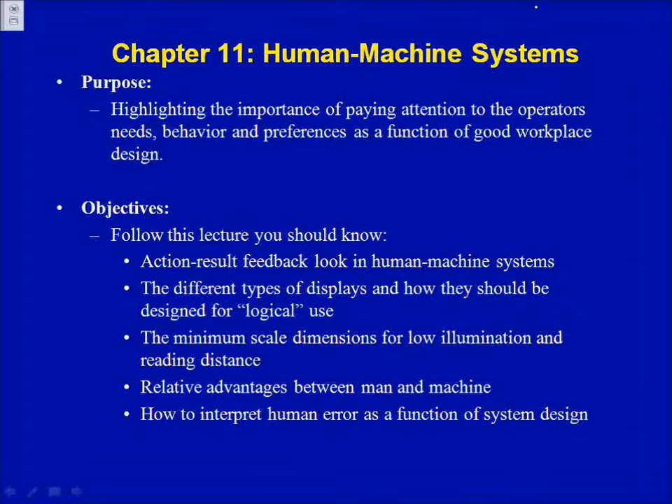But where this also migrates to a little bit is Dr. Proctor's class when he talked a little bit about how we respond to stimuli. And then the idea is how its form and function. And there's some fun things that I want to share with you in this lecture about that. One is that everything that we do is a measurement of risk, right? And there's no risk-free day on anything that we do. It's just the wrong place at the wrong time.

It's just crazy stuff. And I just saw some disturbing stuff on the news this morning about a new thing called One Punch or something like that, where basically you got these little gangs running around sucker punching innocent people, men and women, not suspecting it, and the idea is to knock them out with the first punch and get some thrill from that whole thing.

And so you could be walking along doing everything right, and then someone comes out of nowhere or sneaks up behind you and gives you a sucker punch, tries to knock you out. And it's very disturbing, this new thing going on. Apparently it's happening all over the country, including Chicago. But the idea is that we know what are your risks and always being aware, right? Being in the moment and knowing what's going on.

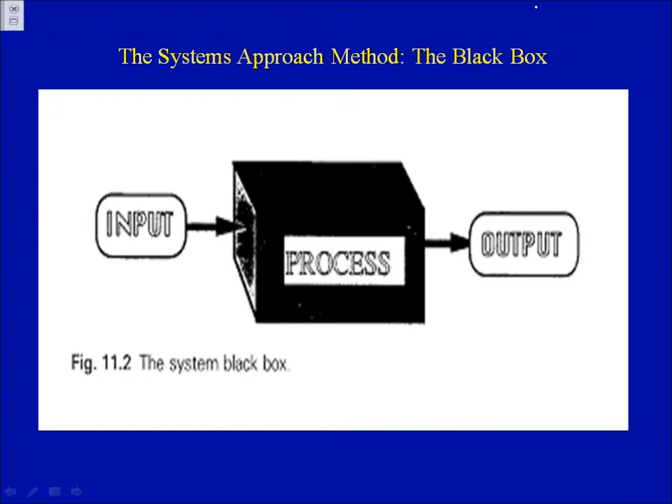Anything under the hood is like a black box. They said, who knew the thing needed oil? Like who knew it needed water? My God, I don't know. I've never looked under here, right? Because cars have gotten so reliable. So to many people, systems work in a black box kind of process, but there's a lot more going on inside that black box. And that's the whole idea of what we do. We have to figure out what's involved. We want to keep it as simple as possible, but we have to fully understand that process.

So in doing that, we have an action result feedback system where the worker or the person inputs information, you have an action, and the machine reacts to that action. You get a result, and then that gives you feedback again, and that completes the loop, right? So there's any number of processes that we're looking at. My lecture alone is basically, here I am, I'm your worker, right up here. My action is to give you a presentation. The machine is the projector, giving you this display. The result is, hopefully you're learning from this, and it feeds back to me, and then I continue the process to the next slide.

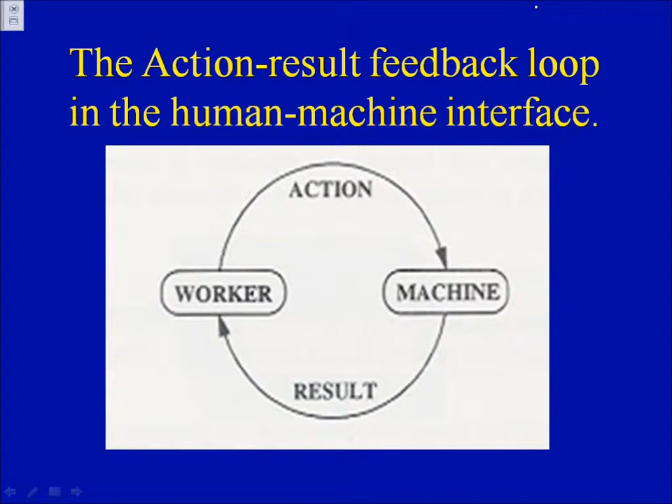So when we get into more complex systems, what we see is that we're looking at environment and materials. We have something very simple right here where we have the machine, we have the effectors, the changes, we have our controls.

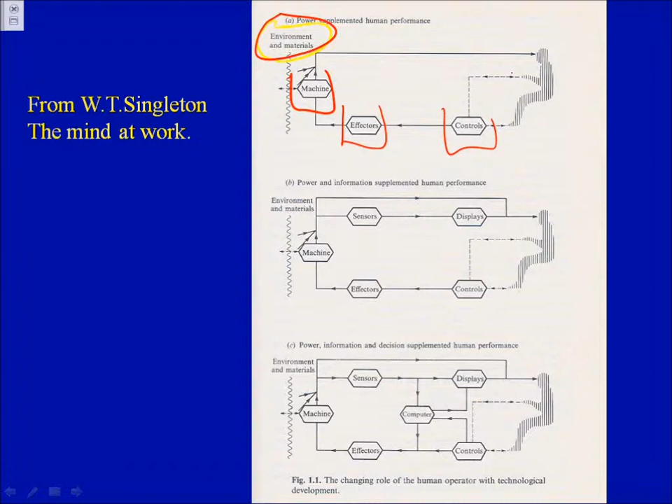This could be like a gas pedal or a brake that's giving us feedback. We're sensing the environment, we're putting that information that goes into that change. The machine could be the engine, for example, and as we're going down the road, it's giving us sensory feedback so we stay on the road.

Very simple system. Now we're going to add to that information where maybe we don't see the road, and now we're looking at not only a visual aspect, but actually we're flying what's called fly-by-wire, right? So one of the things that's been in the news lately is that many of the pilots that we trust our lives to have become so dependent upon the computers flying the airplanes, including takeoff and landing and so on, they are not sensing where they are or that they're in trouble. And so we're starting to see more crashes at airports and so on.

One of those occurred out in San Francisco, right, where the plane came in from Asia, and they're pretty much flying by wire, and they came in too low and too slow, and they basically hit the edge of the tarmac and busted off the rear of the plane. I think 2 people died in that, and one of the people that died was basically alive, but because of all the debris and everything, some rescue truck ran over her and killed her in the process.

But the idea here is that we're going by displays and sensors now rather than visually seeing things. So it gets a little more complex in that regard, and then we add to that the idea of displays and sensors, and then we bring in a computer to modulate everything. And all that information now gives us a process and a feedback where bringing in the computer gives us the quantitative information that we need in order to make decisions about go, no-go.

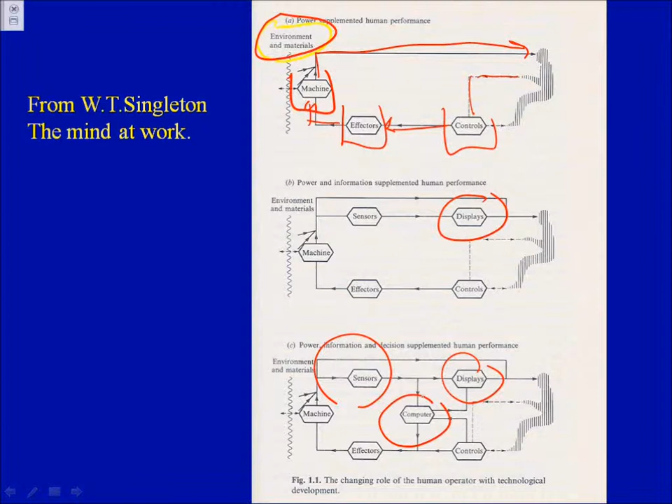And I talked a little bit about this, and in fact, manuals have gotten so much better over time, but we still get these manuals that are written where English is not the first language, and you're trying to figure out what in the heck are they saying, because by the time it's all said and done, it's like, I got 3 or 4 extra parts here. It's supposed to be assembled. Well, did they give me extra parts, or did I screw up? And you're looking at the instructions and the manual and the diagrams, and they just don't come together very well at all. So the idea is that from that producer, not only do we have a product, but we have a manual that shows us how to put together that product.

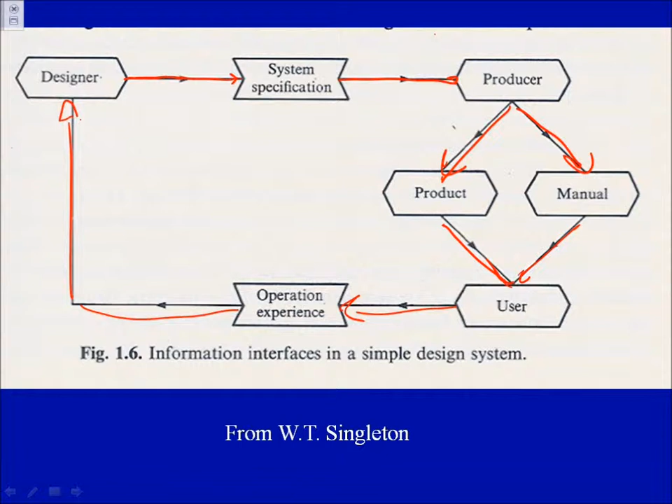That whole thing. So what I'm seeing more and more now, and it goes back to the designer, is that pushing it out too soon can result in some very negative consequences and outcomes. And, of course, we see that as it's being played out on the news daily with the Affordable Care Act website.

So system design process, notice that it gets a little more sophisticated. Our specs, our functions, allocation of those functions. And notice over here we have design of personnel and design of the hardware. And the idea here is on the software side, and this is on the hardware side.

Kind of interesting. Anyone who's interested in mechanical engineering, one of the first things they're going to tell you, if you want to get an advanced degree in mechanical engineering, is: are you interested in software or are you interested in hardware? And if you're not thinking about that actively, you say, well, it doesn't make sense. Mechanical engineering to me has always been about the hardware. And they said, no, there's a tremendous amount involved with software in terms of mechanical engineering and design. So keep that in mind.

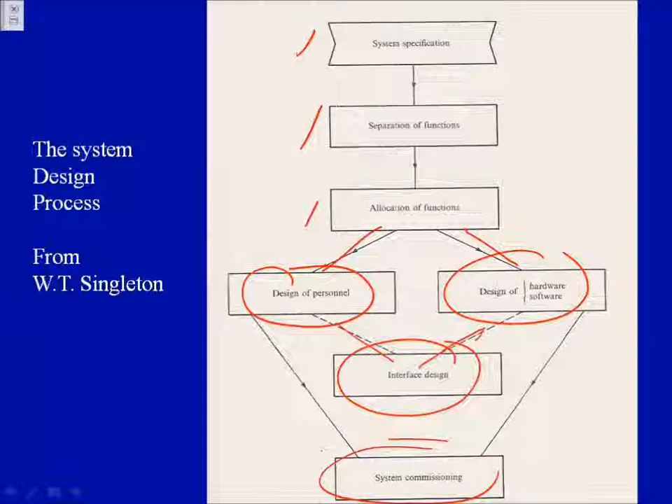And it all comes out here in terms of the interface, the user, and most of you know about that, right? The user interface system. And then you finally commission that system, basically roll it out when it's ready and people can use it. So it gets more complicated now in terms of the human factors side of the equation. Notice we have design and we have operations.

And notice as we go down on this side here, documentation and access, functional separation, internal communications and feedbacks, performance, critical incidents, and accidents, all part of the design process. Over here in operations, we have information presentation and training. Training is critical, right, and the idea is that the more training has gone on over here, it's going to give you some feedback about the design process.

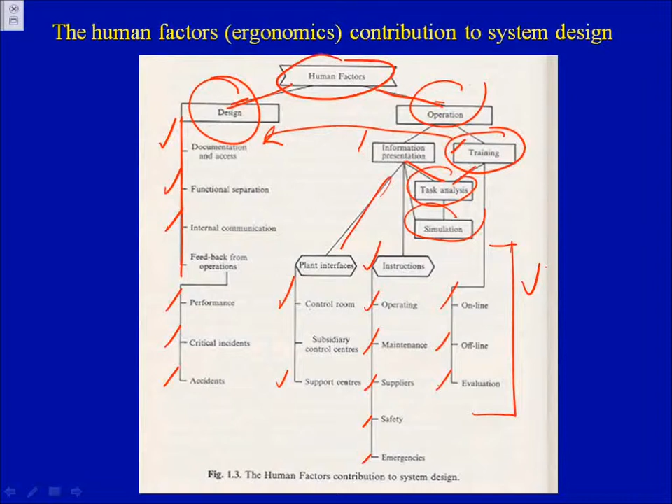But then as you go through this, you have task analysis in terms of how complicated it is. Then you have simulations. But down from this process here in the information presentation, you have the plant interfaces in terms of how it's going to come out for control rooms and so on, all the way down to support, to the instructions. And again, this is about the manual, operations, maintenance, suppliers, safety, emergencies, and over here, online, offline evaluation in terms of how this is going to work regarding the training aspects of it. Not only by the users, but those that do the maintenance and updates and functioning.

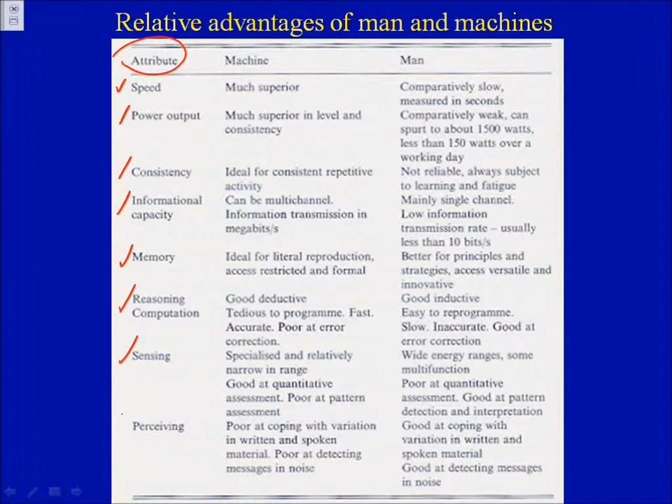So this is one of my favorite slides. I'll hold you responsible for this, so make a note there on a couple of things. And this is really the difference between machine and the person, right? So if we look at the attributes, speed, power, consistency, informational capacity, memory, reasoning, sensing, and perceiving, for the most part, we get trumped by machines.

But it's going to be a while yet. I think the magic number is something like 2050, where finally you reach that tipping point where the computer now has all the sensing capacity and capabilities and thought processes as we do. In fact, I think Time Magazine just came out with a front page article about where that tipping point is between computer and man.

But right now, the machine, in terms of speed, is superior. We're pretty slow. We go in seconds. They actually go in milliseconds and faster. In terms of power output, they're much superior in level and consistency. We're kind of weak. We have our spurts of energy at about 1,500 watts to less than 150 watts over a workday. And right now, in terms of energy output, you're pretty close to the other end of it. Your mind may be functioning, but in terms of energy output, it's lower. In terms of consistency, machines are ideal for consistent, repetitive activity.

No, I don't know what I'm doing here. I don't know why that's here.

We're not very reliable, always subject to learning and fatigue. Informational capacity can be multi-channel. I'm multi-channel, I can do more than one thing. Believe me, you cannot multi-channel. If you're looking at your computer right now, it's something else. What you're doing is you're sharing, you're flipping back and forth with me.

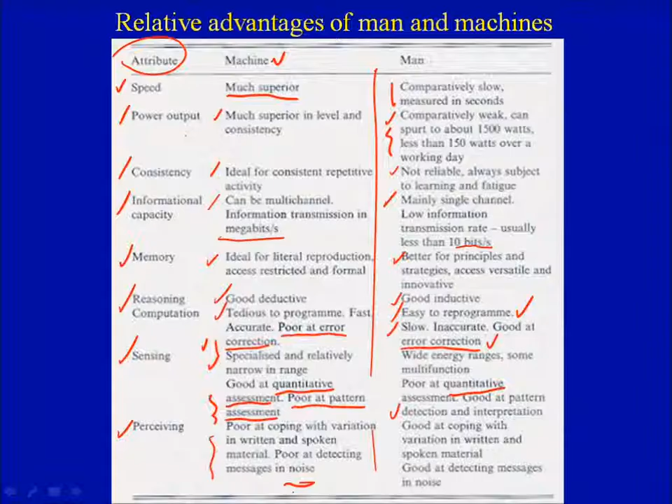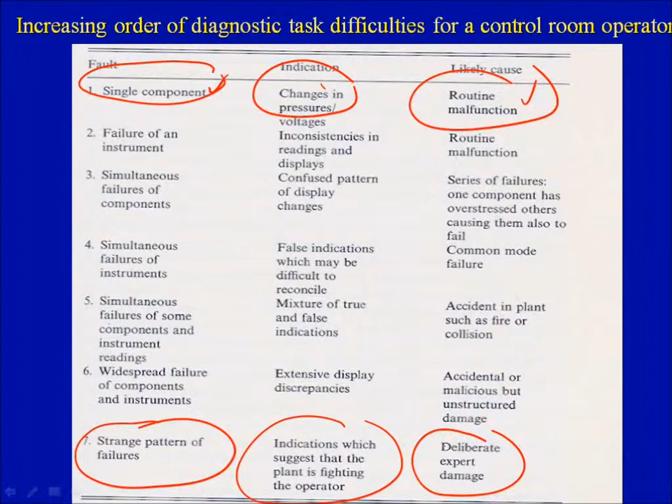And so what happened is, as in deliberate expert damage, they, unbeknownst at the time, were doing damage to a system that was trying to protect them. Very interesting. So it doesn't always have to be sabotage. It can just be they've never seen this before and reacted in such a way that the computers now were fighting them in terms of controlling the nuclear process.

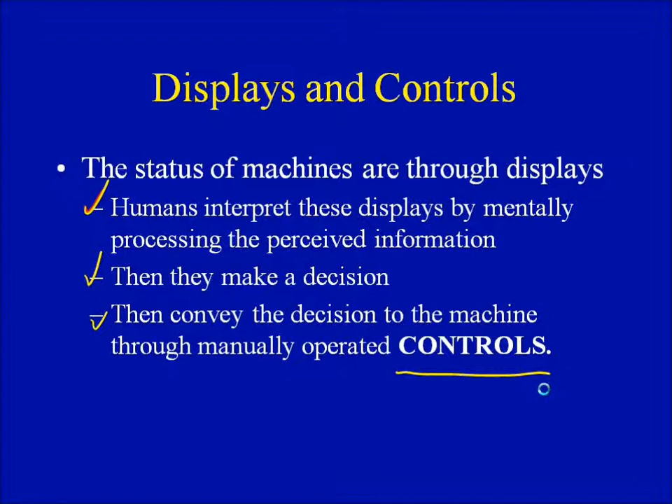Displays and controls. The statuses of machines are conveyed through displays. Obviously, humans interpret these displays by mentally processing and perceiving information. Then you make a decision, and you convey the decision through controls. We have direct and indirect. So direct sensing would be touching a hot stove, what you feel in terms of comfort level in this room. Is it too hot? Is it too cold? Is it just right? Indirect is a gauge.

So while I'm feeling and sensing the temperature in this room, I can go over here and look at this thermostat, and man, it is warm in here. The guys are saying, and the girls are saying, no, I don't think so. To me it's got a little bit warm up here. It's about 76, 77 degrees, according to that thermostat. But that's what the temperature is right there, not what it is back here. It's going to be different around the room. But there's your indirect, gauges and signals and so on. So I'm figuring it's somewhere between 75 and 80, depending upon where we are in the room.

And of course, we know why the ladies feel cooler than the men, or why the men are warmer than the ladies. You knew this from my first lectures, and why is that? Why are the men warmer than the ladies, or feel warmer in the same environment? You know this. It's an exam question. Yes? Well, the metabolism is going to be a little bit higher, but what drives metabolism? I'm going to give you a suggestion. Right, cross-sectional area of the muscles. Muscle mass is typically larger in males than females. Not always, but it's a larger cross-sectional area.

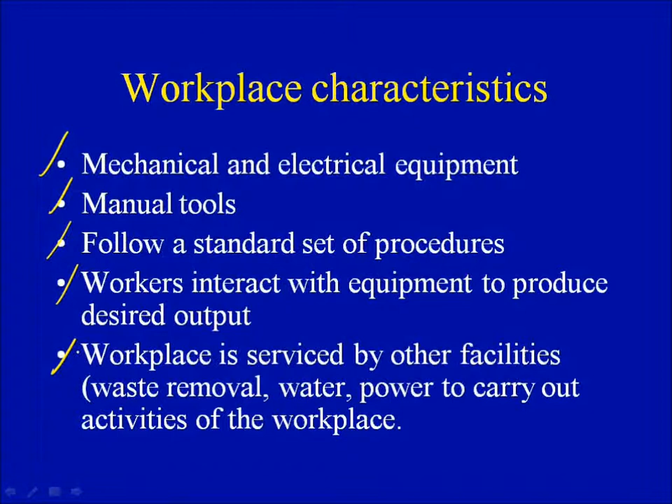We have tools to perform the work. There are standards and procedures that are in place to do the work. They interact with the equipment. There should be a layout or a protocol toward that end. And then there should be a maintenance process to that, because things do wear down. In terms of ergonomics and human-machine systems, design of tools to match the physical characteristics of the worker.

And again, what I've emphasized from the very beginning is that this is not about differences between males and females. This is about raising awareness in terms of those differences and leveling the playing field so that everyone has a shot at what they want to achieve in the workplace. And that's what this whole idea is about. It's not about let's grab Josh, for example, because he's a big guy and we're going to have him move these big bales of heavy things from point A to point B.

I said, well, why don't we get a vacuum unit and attach that up, and any one of you now here can just attach that to it and pick it up, bring it over here, and drop it down. Not only that, you can figure out what your return on investment is, and within 6 months, you're going to have that machine paid for. And not only that, you can hire anybody that you want because the machine's doing the work. So that's the concept behind this. A lot of companies don't get that yet.

Design of the workplace and workspace to meet physical characteristics. Design of controls and displays to allow the worker to operate and monitor the system processes. Development of job procedures that meet the worker's capabilities. And that's really the key right there, meeting their capabilities. Minimization of effects of external factors such as noise, temperature extremes, vibration, and so on.

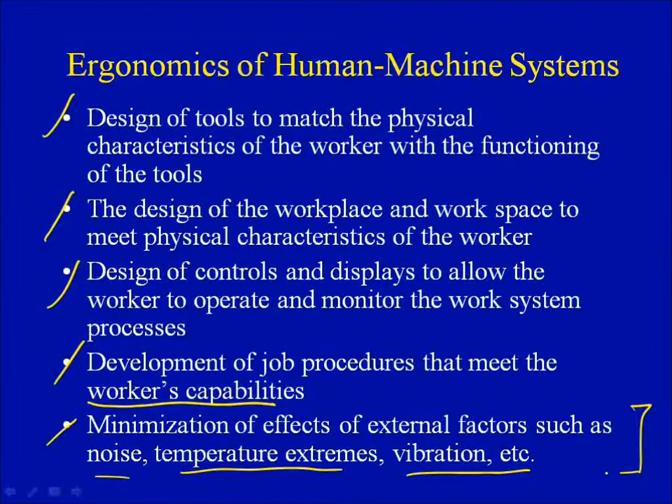Steps in design: objectives in terms of desired output, your input specifications, your materials, process description, functional allocations, interface design between the operator and the system components. This is form and function, just like you see right here. This is my interface in terms of basically what I'm looking at on the computer and what's being projected to you here. Facilitator design, mechanical assist, as I talked about earlier, and then testing and evaluation to make sure that the system works.

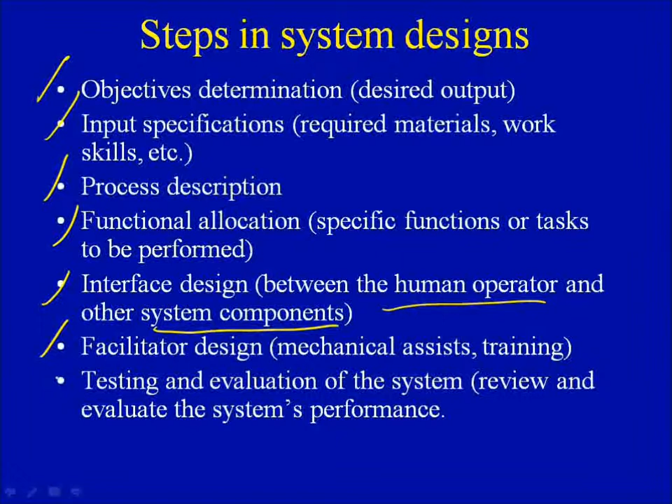Steps then are number one, prepare what needs to be done for the person to do their job. Observation, what information data does the worker have to do their job. Decisions and mental processes to do the job. So it's not just the physical aspects, it's also the mental aspects of it. Physical demands then, what are the physical tasks involved? And again, if they exceed most people, then the idea is mechanical assist, right, to level the playing field. And then termination, what steps do you need to complete the job? So in other words, what's called a work cycle.

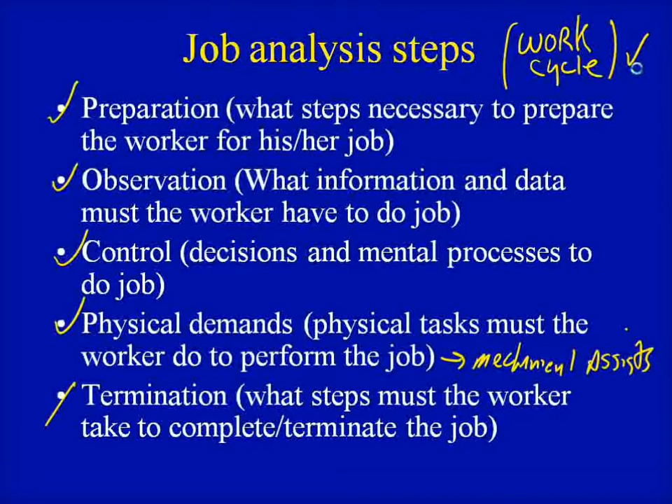Okay, so remember this, because we're going to get into that, and I'm going to test you on it. This is the work cycle. There's not a test that I have given where I've not asked this question in various ways. And so the idea is that we start out and we define a job, right? So as students, your job classification is student, right? We'll just start out there.

But then the next step down is what functions do you have throughout the day? Well, I get up and maybe your routine is to study a little bit in the morning, or maybe have breakfast and study a little bit in the morning. Maybe there's a workout involved, that kind of thing. You go to classes, then you have lunch, and so on. So maybe these functions that you have listed up here would be going to class, okay? And then the next step would be, what are the tasks with the function?

The tasks are coming in, actively listening, taking notes. Maybe before that, you're going to print off a copy of the presentation so you can annotate as I'm talking. And so that's the task. What are the elements? The elements would then be taking those notes to the specific slides that I'm showing in the slide deck. And then finally, the micro motions are putting little notes or asterisks there when Dr. McLaughlin stops and says, you really need to know this slide. So the micro motion is, I'm definitely going to put some little notes right there,

maybe some eyeballs. I love to put eyeballs in, because my colleagues at Yale who went to school with me at Michigan would kind of make fun of me, because whenever something was really important, where the professor would say, you really need to know this, I would always do one of these things right here. And if it was really important, I'd really start raising those eyebrows like, make sure you know that, and that, and that, and then that too. And then, oh man, make sure you know the whole thing from the top to the bottom. By the time I got done making all my notes, it would look like that. And they made copies of that and sent it to me later. And they'd ask for my notes. I was flattered, but they were actually having fun with me making all these notations.

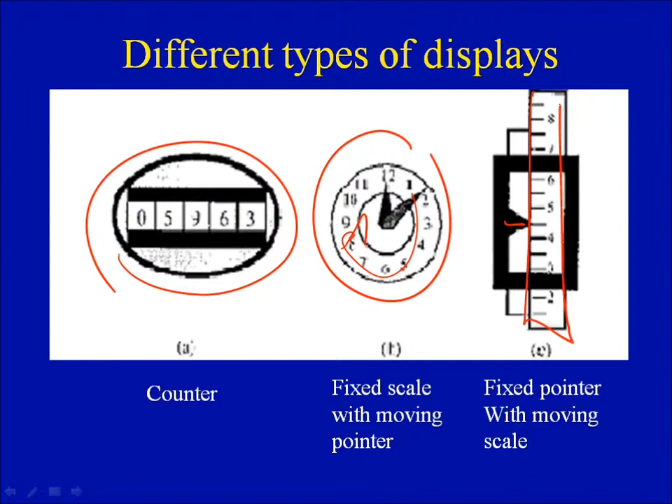Okay, so we get into controls and counters. These are good just at a glance. We can have a fixed scale with a moving pointer going around in a clockwise position. Or we can have a fixed pointer right here, and then this moves. This could be like weighing objects and so on. So guidelines for designing displays. Minimum amount of information needed to make a decision. You don't want too much coming in. Use digital readouts.

Use circular or semicircular scales instead of vertical or horizontal scales. Avoid moving scales. Use major markers in a natural order like 1, 2, 3, not 2, 8, 9. Avoid multi-scale or multi-pointers. Too many things going on to process. Display should be in a direct line of sight by the operator. In other words, you shouldn't have to look up or look down, but straight ahead or up at an angle. So where that exit sign is located, for most of you, it's within the angle of your line of sight.

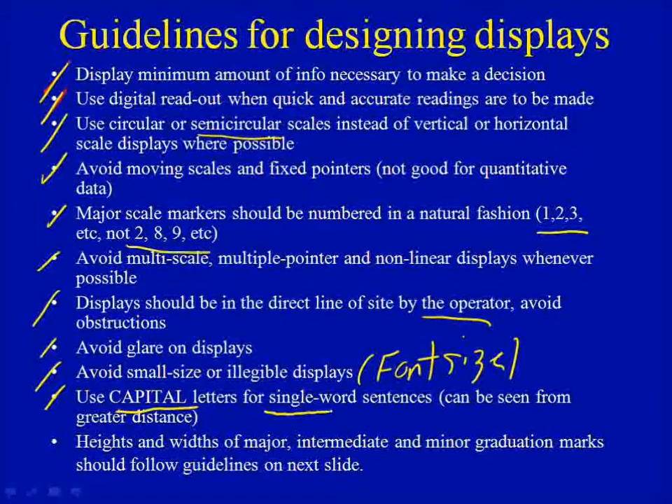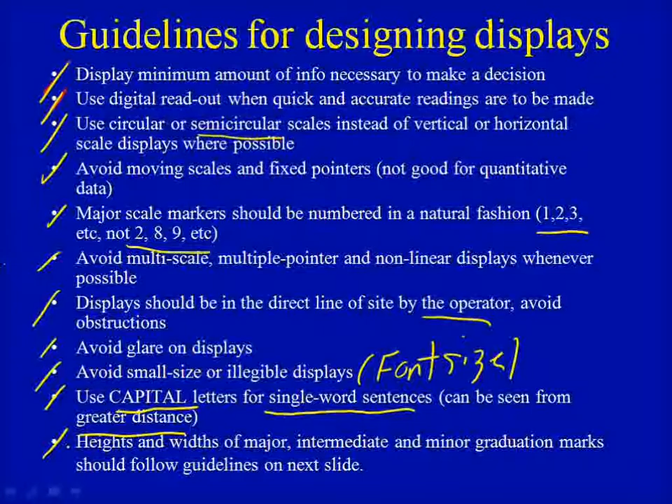Avoid glare, small size or illegible displays. And again, this is all about font, right? And I'm going to talk a little bit about that in a few minutes. Use capital letters for single word sentences. This can be seen from greater distances. Ta-da! Look at exit, right? You don't see a big E and a small X, I and T. They're all caps. Heights and widths of major, intermediate, and minor graduation marks should follow the guidelines that I'm going to show you now. And so this is where I'm going to ask you a couple of test questions that may become extra credit on the midterm.

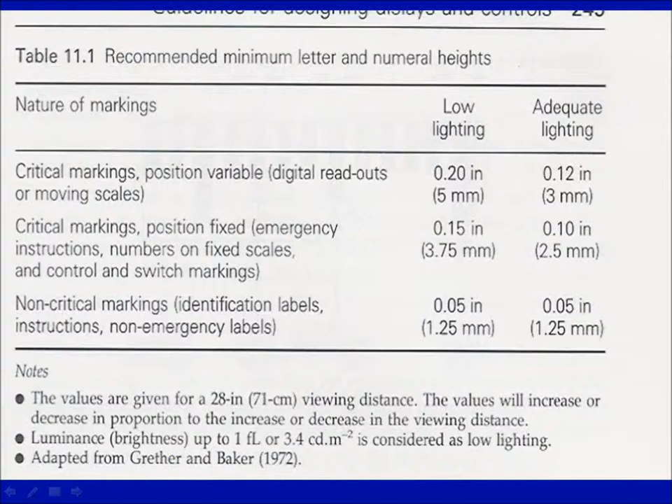And then in the next slide, right here, it also tells you about the width. The width in all cases will not be the same as the height. It's usually a fraction of that, 3/5, 4/5, something like that, and you can see those numbers. I will not hold you responsible for memorizing these differences, but notice the critical factor is the height.

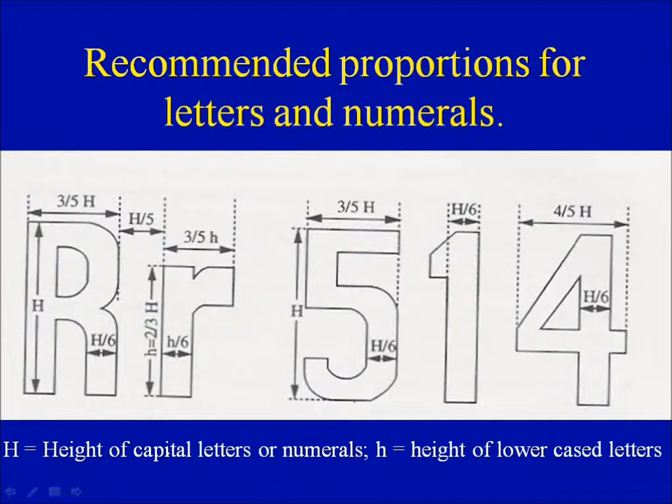And then the distance apart and the width of the letters and the numbers then are a portion, right, of that overall height. So remember that as we're going through and doing this, because you can basically determine how far back something is and pre-orchestrate what size font you're going to have so that the people in the back can very comfortably see what you have without the aid of glasses. Is that cool? You can do that. It's like, oh, who knew? Some people do hit or miss, but there's actually a science to that.

Same thing with strokes, keystrokes in terms of major marks and minor marks and so on, and distances apart. I won't hold you responsible specifically for these kinds of things. Just remember that basically the length of the stroke is our reference point, and then the distances between them and the shorter marks right here are regulated based upon the size.

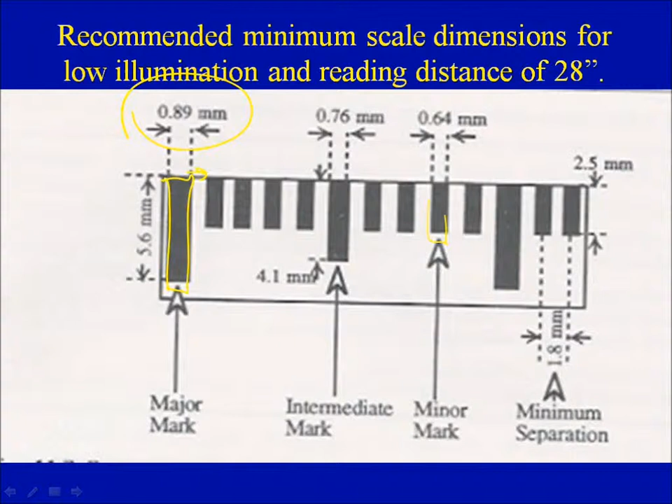So, guidelines for warning. One, size. Warning lights should subtend at least 1 degree of visual angle. In other words, basically angled out so that you can see them easily. Color. This is your order of response. I'll hold you responsible for this. First red, then green, then yellow, then white, in that order. This is for eliciting a fast response.

Okay? Flash rate. This is steady light attracting someone's attention. Optimum flash rate, check this out, 4 times per second. Who knew? Any faster, you get a strobe effect, right? And slower, and it's kind of on and off. But in order to elicit a human response, it turns out that 4 times a second gets our attention. So there's a science out there. Contrast with background, brightness and color enhancement effects, warning lights, multimedia presentations, auditory.

That's one of the reasons why I have this little microphone connected to me so you can hear what I'm saying along with the slides. Because it's one thing seeing the slides, but it's another if you complement or marry my voice with that, especially because you can hear my pitch, you can hear my emphasis, and so on. More people can understand the information when you give it to them in multimedia.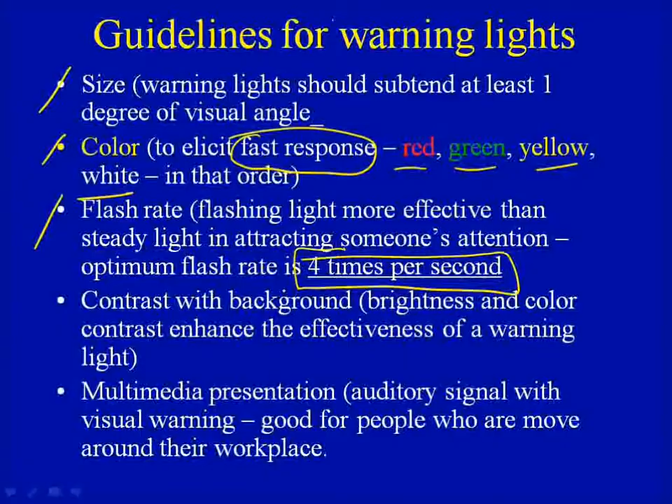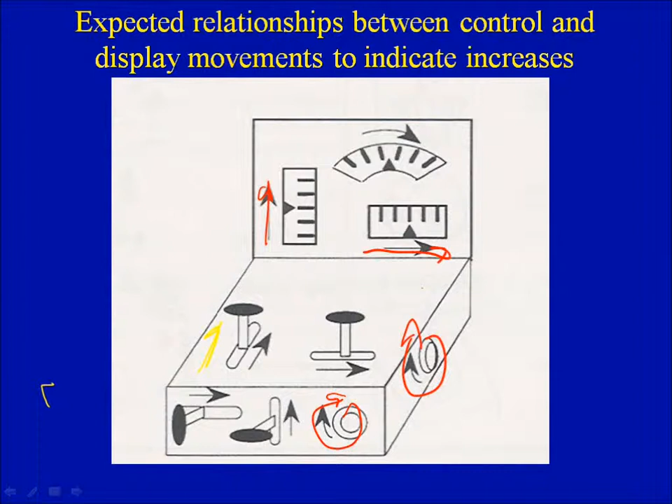So controls and display layouts. Very quickly go through this: forward and back, side to side, on the front, in one direction, usually from left to right. Controls on the bottom would go up, always in a clockwise position. You notice that? In most controls that you see right here, very seldom do you see it going in a counterclockwise position. That's a test question. Almost all controls that we see move in a clockwise direction. Pointers going up right here, again, left to right, and then scales again going clockwise from left to right.

In terms of system responses, this is a light button. When you press it, it lights up, right? So you get a light button. Rotary, as your arc, for example, if it's less than 180 degrees, you shouldn't be laying it out like a compass. It should be laid out in the form that you see here, because if you know this is 180 and you're only going to be showing something that's 120 degrees, it should kind of match what that angle is, right?

And if it is truly a 360 going around through an arc, then you're going to have a full cycle going all the way around through that arc of more than 180. Linear dimensions, moving in one direction, is better. If it's got to move in two directions, an XY, then it's good to have a control stick. Switches, interesting thing here in the United States: turning things on, the light's up. Turning things off, the light is down. Off, okay, up. If you go to Europe, it's the complete reverse of that.

Up is off, down is on. You know, we have all kinds of other issues, all right? 110 versus 220 voltage and so on. But you have to pay attention to where you are. So this is a little more US-centric.

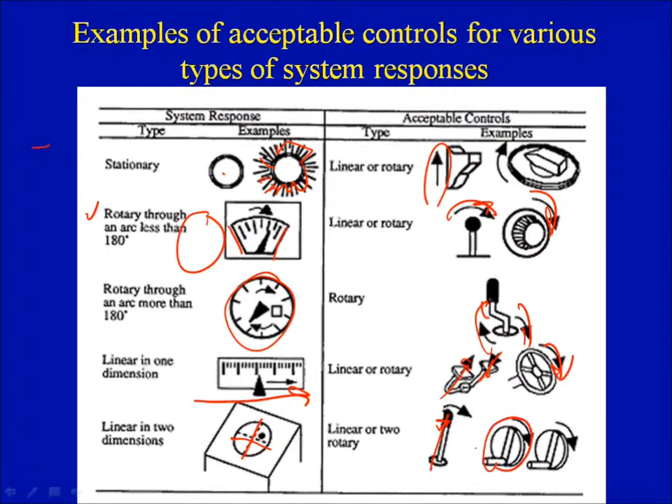This is another thing. So again, I'm not even going to get extra credit, but I want you to understand the idea of control response. And the idea is that how do I design a control panel so that if I'm moving a joystick, and many of you have experienced this on your controls for games and things of that nature.

I'm not a gamer at all. Sort of missed that thing as I was growing up, but I know some of you are really good at this.

How do they determine the size and height of the joystick and how much movement there's going to be versus what you see on the television, right? That you see ahead of you or on the screen. And the idea is that basically, what is that angle, that alpha? So some of the questions would come out is that you can actually design, if you look at alpha as the angular movement of the control.

So let's say that's your unknown, and you know the length of this, that's your lever arm, that's your joystick, if you will, your display movement. This is the movement on the screen. What you're basically looking at is a control response ratio, you can solve for alpha in terms of how far you move that joystick in terms of degrees, right? So some simple algebra will help you resolve that.

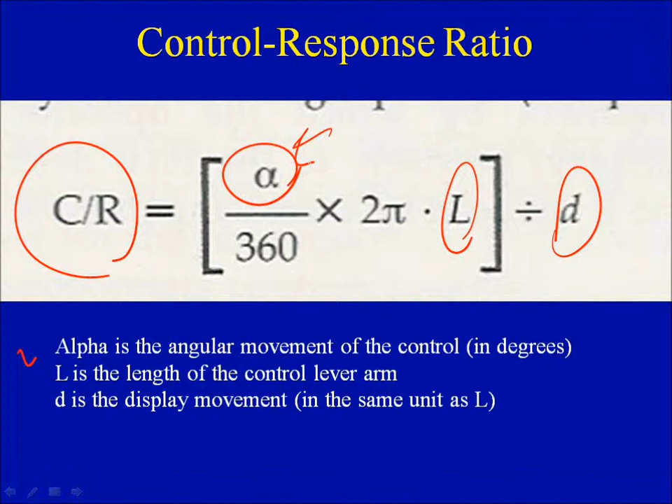In this case, if we're looking at something that was about 5 inches high or so, if you run the math on that, you're going to see that basically you're going to move anywhere between 2.5 degrees in one direction as a minimum in terms of response to 4 degrees as the most sensitive, right? Sensitivity on that. So you can do those calculations and solve for alpha in terms of stick movement, but you have to have all the other information there. You have to have D, you have to have L, and the rest of it's all right there in terms of control and response. So there is a science to that, and I just wanted to raise your awareness to it. And this is an example and an illustration.

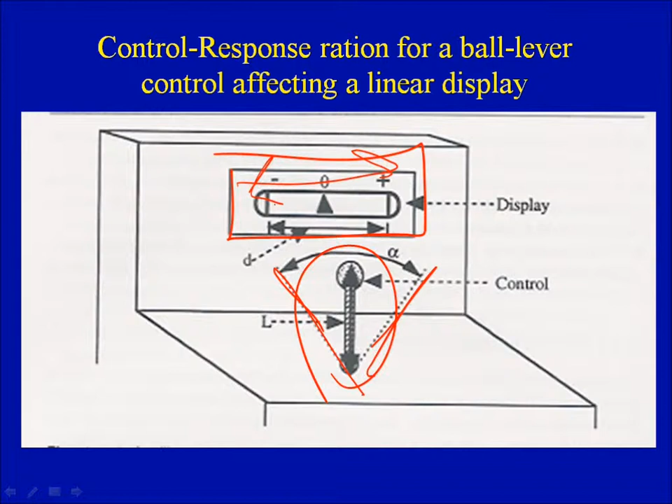Consider this your game stick right here, and consider this to be your screen. How much movement is going to be here versus how much movement back and forth we're going to see, whether it's a car or, you know, whatever it is the games do these days. And this is what it looks like.

I will hold you responsible for this, and that is when we look at gross adjustment right here, and this is very much like, the best thing I can come to is even on my car that I have now, it's a more modern car, you can have preset buttons, but they got away from it for a while, especially with the Japanese cars. It was push button. Problem is they made all the buttons really tiny for the tiny Asian fingers out there, but realized Americans were buying these things, so I hated them because we have big fat fingers and we couldn't hit those little buttons. So they went back to a knob, right, to control for radio stations, and you rotate until you hit the station that you want.

So when I'm down in Indianapolis, I like 104.5. I don't know if maybe you've heard 104.5, but they have a variety of music, that kind of thing. When I'm up here, I believe it's 98.7 or 97.8. Anyways, one of those stations, kind of a variety of music there as well. I think the one down in Indy is a little more hip than up here.

But anyways, the idea is that as I'm rotating from 98.7 to 104.5 as I'm driving to the airport, I'm moving really fast, right, all the way down to get to that 104.5. And so this is your time that's being used.

And notice how fast I'm moving right here. But then as I approach that station, look at the time element in terms of coming down right here for that fine adjustment until I hit that station. In other words, my control response right here shows me that I'm moving really quick to get to that station, but as I approach it, I have to slow down, right?

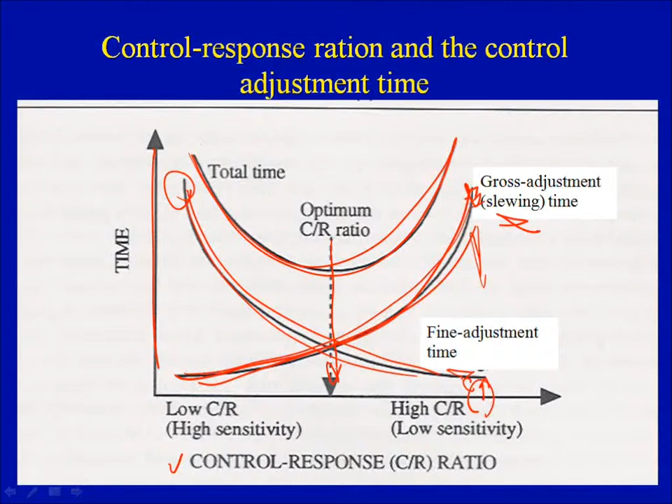So last couple pictures on this, kind of like your timeline. Everyone can understand this one. This is drawing bath water, in terms of symbols. So here you're running a bath, and say you have your hot tap. It's off, now it's on, and you're running all that hot water to fill up your tub. Now your water temperature is really picking up, and you say, ooh, that's too hot, way too hot.

Your water level, of course, you're filling up the tub right here, and at that stage you say, ooh, I got to put on the cold water. There's your cold tap. It comes in, and it gets just about right as you're bringing the temperature down. And now, say, oh, it's too cold. I got to put my hot water back on. Hot water then brings it up, and then boom, you're so happy. The tub is full, and it's just right.

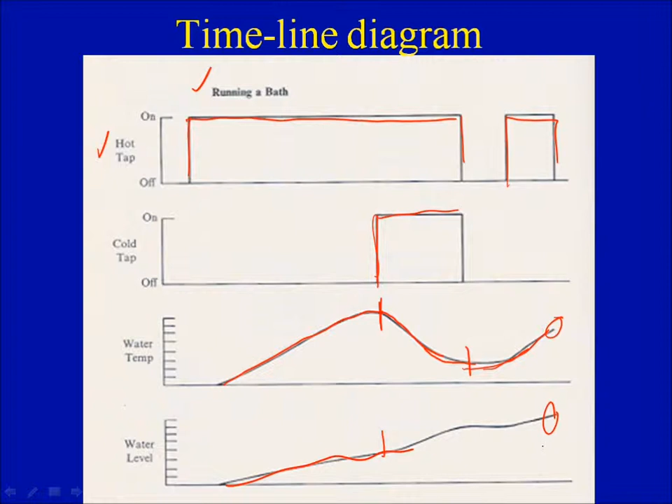No one does that, huh? Okay.

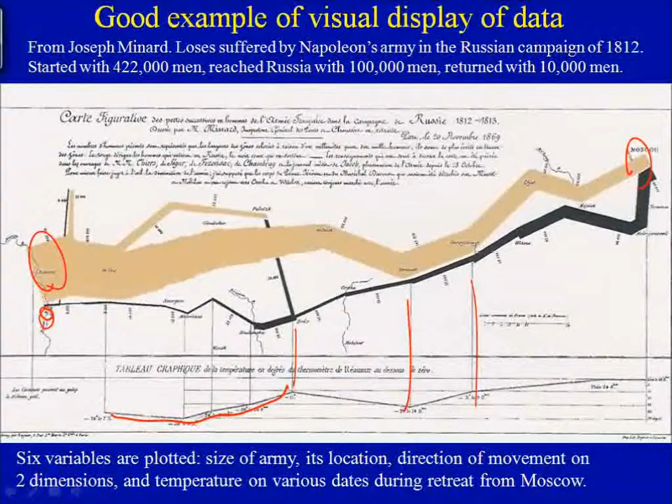So, end of that. Okay, ergo programs. I'm going to go through this real quick, but there's 5 slides I'm going to circle I want you to know. There is a book in the library. I'm a co-author on the book, and so that's why I'm pretty familiar with this process. But there are 7 steps in this process.

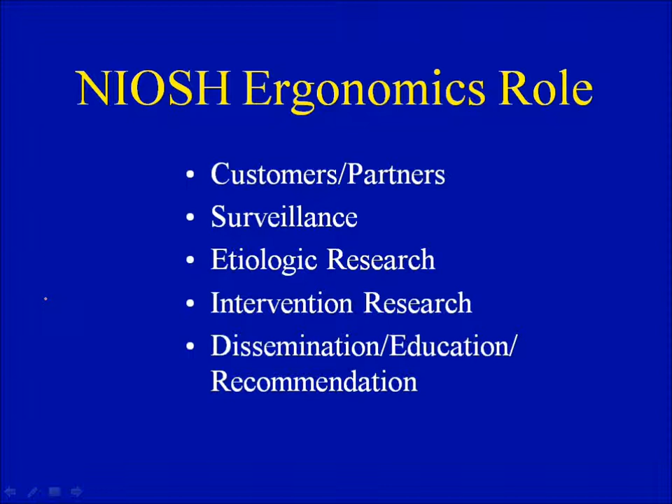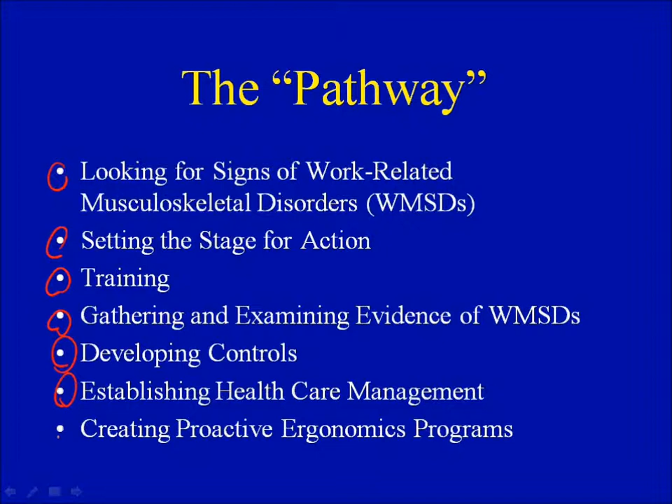And you want to follow the main steps, because the first half of the main text gives you information about it, and then the second half is toolbox, things that you can use. And the pathway are these 7 steps right here: looking for signs, setting the stage, training, gathering evidence, developing controls, establishing healthcare management, and creating proactive programs.

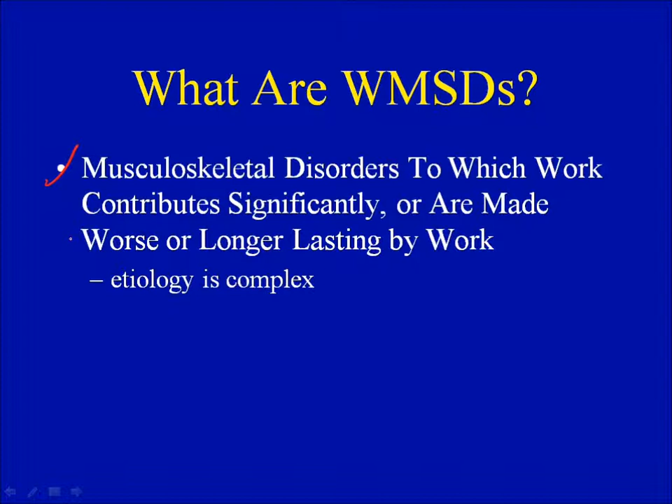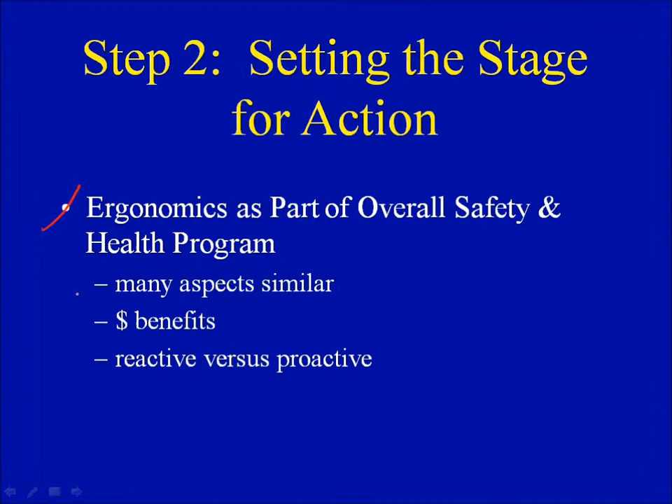So what are WMSDs? Basically, we're looking at work-related issues that come up or are made worse and last longer by work. The causes are very complex. So our first thing, we're looking for signs, determine that effort. Number 2, we're looking at what are the aspects in terms of overall safety and health program, what are the dollar benefits. Also, we want to look at the policies and resources out there.

Motivations. Employee involvement is really critical in this process. You've got to include them. And training is important, job awareness, issues that come up, calibration. In terms of your training, now that you've had it, especially if you've done a project, think about it. You know the general ergonomics issues. You can form awareness, instructions about training.

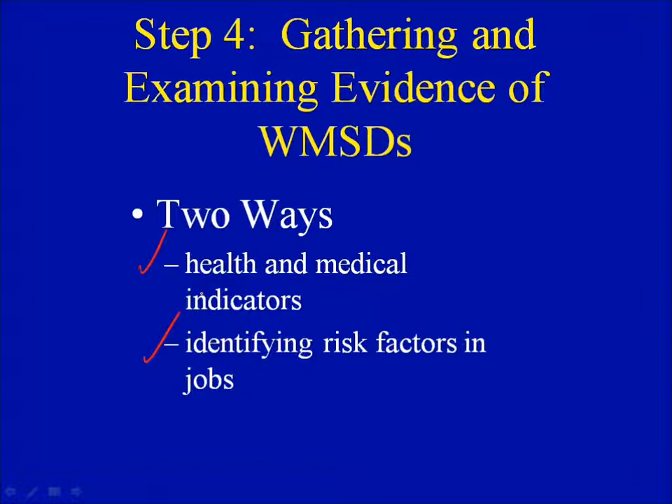You've done analysis. You've been involved in problem solving. So you really are a team of people that are informed and not only can see something, but come up with recommendations to make it better. Gathering evidence, health indicators and job risk factors. Medical is important in terms of follow-up. Also looking at the risk factors, reaching inside boxes, overhead work, and so on.

And then this is a, did anyone recognize what this is? Place that makes caskets, right? So these are, a grave job for sure. And the idea is that this guy's carrying this. I said, why are you carrying this stuff around? And they said, well, that's the way I've always done it. I said, put it on a cart for God's sakes, and roll it around. I said, these things cost you $15,000 to $20,000 a pop, right? And so you want to make sure it's in good shape.

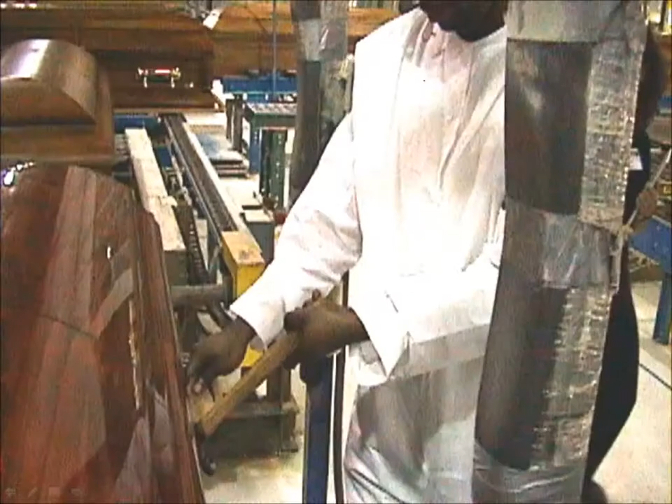They said, well, you do have a point there because, as we put these things together, notice this handle right here? Well, if we go back to this first slide, look at this distance. Check this out right here. Basically, they're fastening the top and the bottom of the casket together, and because they have to reach out and do this, the screws are off, right? And so they just kind of drill it down, and when they close it, if it doesn't latch up, they said, oh my gosh, we got a problem.

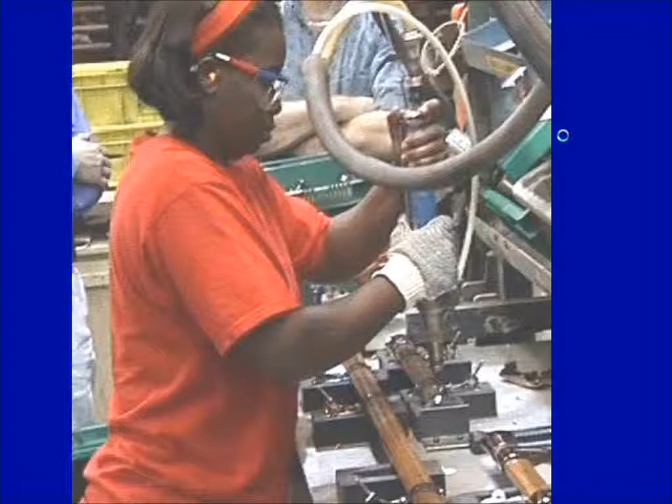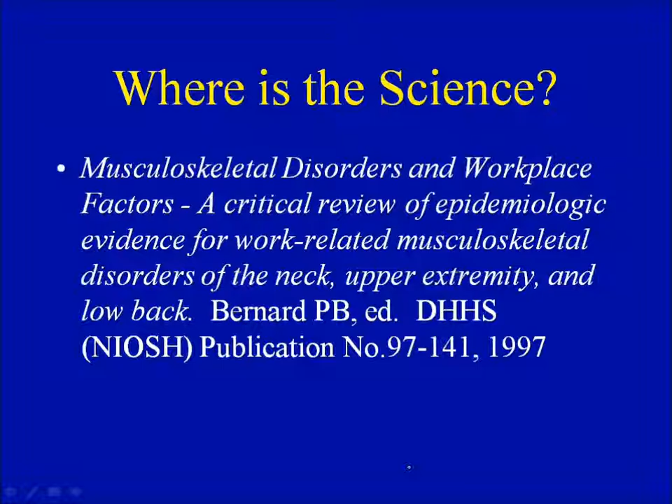And so later on, they're using a hammer to straighten it out. They said, well, it only has to work once, right? So, and they put the rails on and so on. They staple the battens on, carrying stuff up and down, reaching overhead. All these things come into play. There's some science behind this. So notice that this is not magic or art, right? There's some science here. And then if we go down, analysis and so on, setting, control.

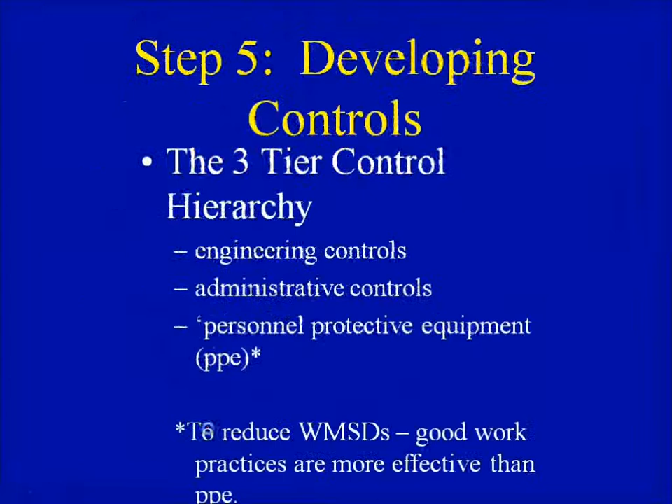Hang on, guys. I'm not done.

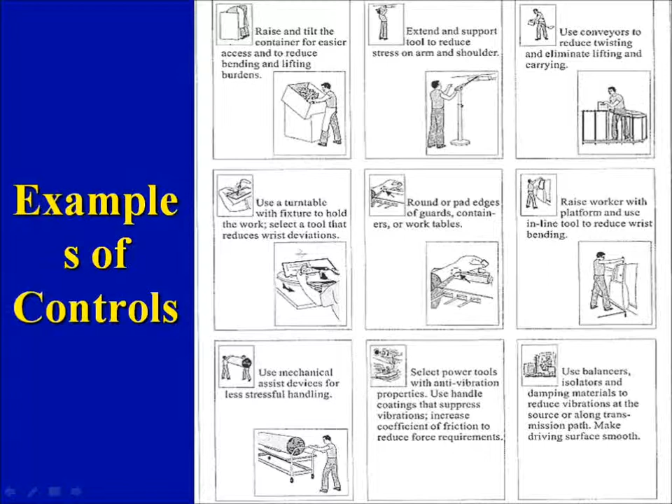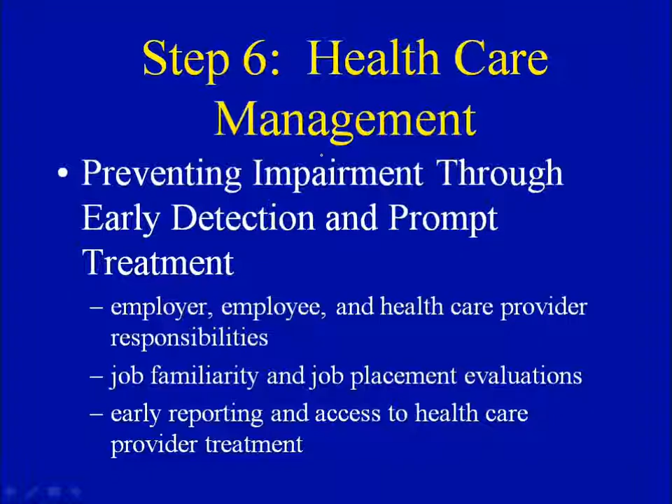You might miss something. Developing controls in terms of back belts, good work practices, and so on. And here are some examples of what is and what can be done. So pay attention to that slide. And then finally, just simple controls like a stick, right, to move a lever. Simple controls here. And healthcare management is very important. That's where the doctors come in.

Then finally, this is the final thing. This is important because you're going to see this. This is the only one that's different than the other 6, and that is being proactive, right? In other words, anticipating you're going to have an issue and then preempting that by going out there and designing it out of the problem, prevention through design.